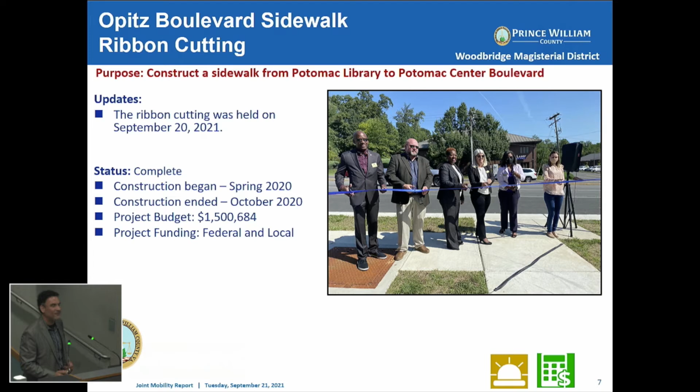Now to some of those active projects that I mentioned earlier. And like I mentioned again, all these active projects, although I'll be talking about the road element to it, have a pedestrian and bicycle element to it, either 1 or 2 facilities, depending on the project itself. First of all, the Broad Run Station and Yard improvements. This is a VRE project. Obviously, some of the related projects to us are the Route 28 Phase 3 and some of the Residency Road Trail that we're doing with that project to connect to this project, which gets its final design completed later this year.

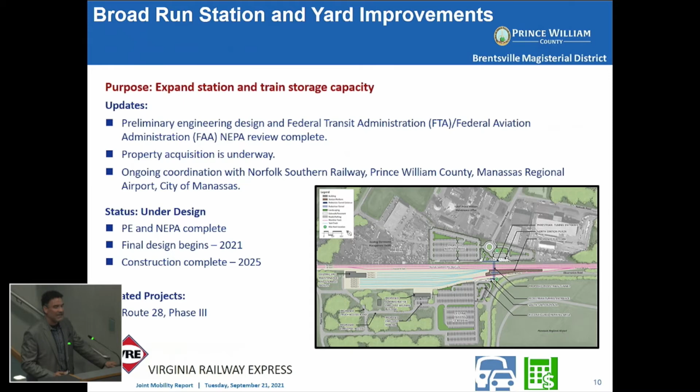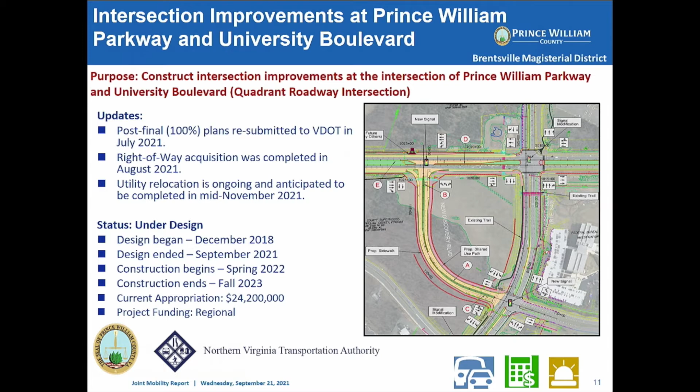The intersection improvements at University, this is our quadrant intersection. We've run into a little bit of an issue and challenge with the utilities out here. Nothing we can't get through, just takes a little bit more time. But we are pushing the bids out to come out later this winter. And so hopefully we can be constructing this facility in the spring and still keep to our timeline of fall 2023.

Route 28 up here, this is a project being done by VDOT. As you can see, they're putting out the little concrete, making that intersection a little safer. And this should be done. If it's not done already, it's very close to being completed out there in the field.

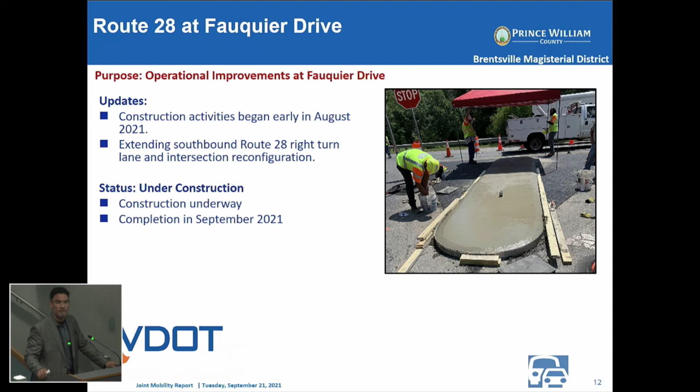Route 28 Phase 3, this is another project that's about to be completed. At least the road part of the project is about to be completed there. We're going to be inspecting this project here, Supervisor Lawson, with VDOT this month. Hopefully the road improvements are going to be good to go. We're going to be able to open them to traffic. The only thing that we're working through again through the end of the contract, which is June, July of next year, are just the pedestrian and bike facilities. One on Route 28, on the Innovation side of Route 28, and the other one on Residency Road, as I mentioned earlier, to hook into that facility for the Broad Run parking.

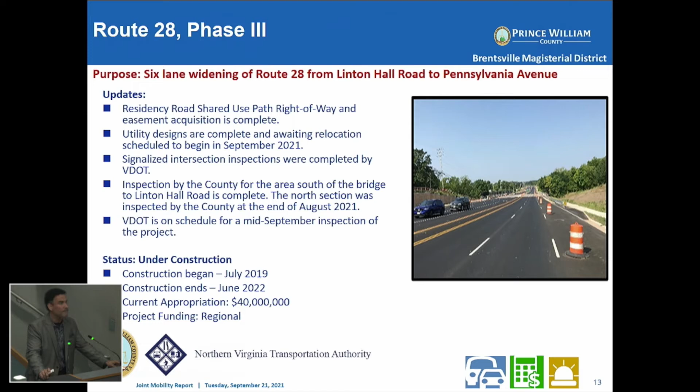University Boulevard extension. So this is when we start talking about Devlin Road, which is one of our bond projects that we have in our 2019 bond referendum, and we're getting completed with other people's money. But we'll start talking Devlin Road and Balls Ford Road here. We're going from west to east. This is the first one, which is the University Boulevard extension, which extends University Boulevard from Edmonston out to Devlin.

But at the same time, it also creates the intersection at Devlin and University that will hook into those Devlin Road improvements we're about to talk about, and is the leg that also transitions into the final leg of Devlin out to Linton Hall that we are seeking funds for and remains on the 2019 bond. So you see that's 2 different improvements. This is our revenue sharing project, so it's half being paid by the state, half being paid by us, and we're doing it in conjunction, as I mentioned earlier, as part of a larger set of improvements here.

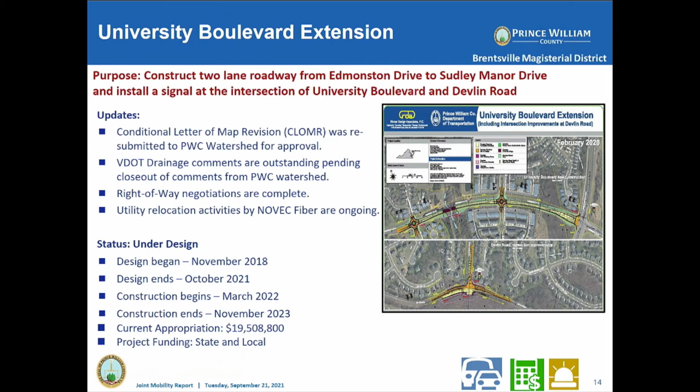This is the Devlin Road North. So I said we were moving from west to east. So this is, as you see here, let me see if I can, there, oh wow, look at that. As you see here, this is the improvement that I was mentioning in the slide before, and it hooks in to the remainder of the road.

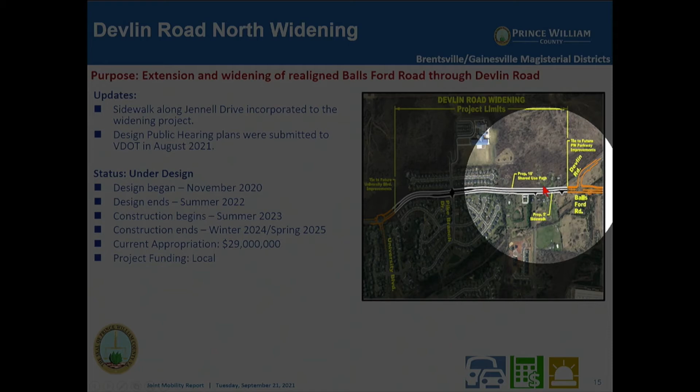This is what we're going to talk about next, which is the Balls Ford Road interchange. So this is the road in between those 2 roads, again, going from west to east. This is the one that's furthest behind. We actually were able to get some funding from the leftover funds of the Balls Ford Road interchange, but it did lag us a couple years behind that project because we did not receive those funds until a couple years after that.

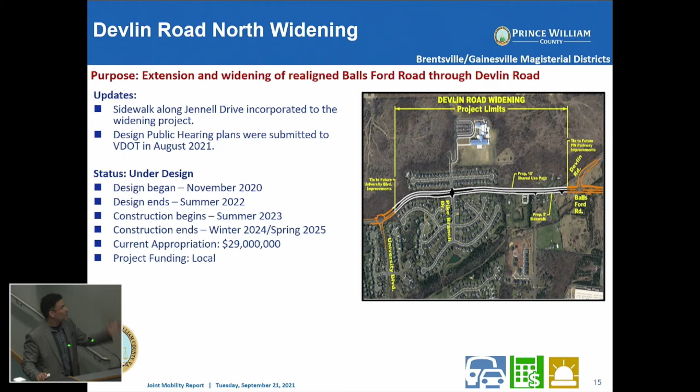The good news about this is the part of the road that was part of the road bond program, and we're able to fund it through VDOT funds and we're able to construct it. We're trying to get this sped up as quick as possible to have construction ending in the winter of 2024, but with some possibilities going into the spring of 2025 to complete the project. It is a $29 million project, and again, VDOT funds as well as $4 million of CIP funds to complete the improvement.

And it literally took from 7 p.m. one night to 6 a.m. the next morning to complete, because we did come into some equipment issues in the middle of it. We were scheduled to be done by 3 in the morning, and it had to be pushed a couple hours. But the sun did come up, and we were finished concreting the bridge, so it was good to go here. We're still on line to finish the main improvements by November 2022, and we're still in some discussions about the roundabout over at Randolph Ridge and how we deal with that safety improvement.

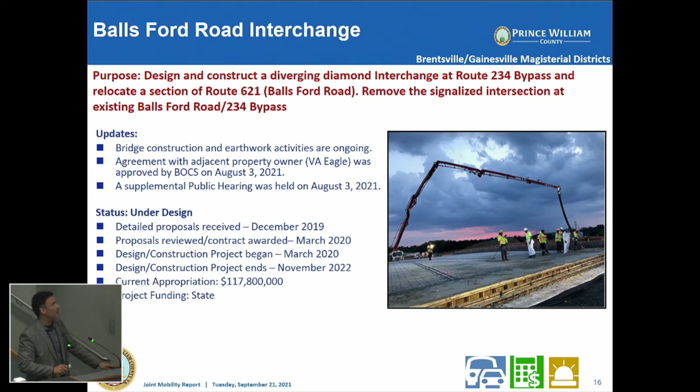The next one is the Balls Ford Road widening on the east side of the 234 bypass. This one takes us all the way out to Sudley Road. We are lagging a little behind because we had to build a duct bank as part of this project, like 5 months behind the initial date to be constructed. We have put an incentive in the contract, over $1 million, to see if we can get this done on time. If not, the contract due date would be May 2023.

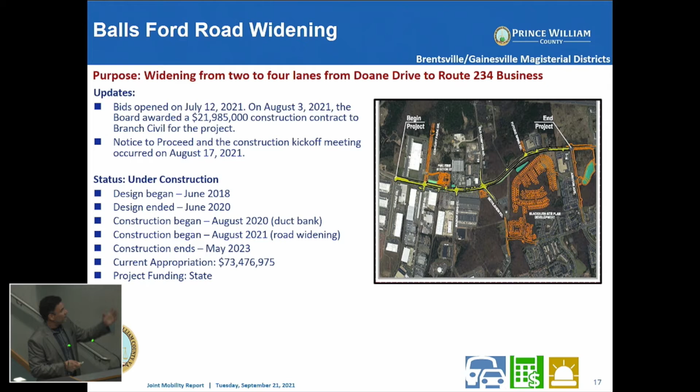We're in constant coordination with VDOT, so they understand where we're at on the project and what we can get built as we finish up with the duct bank out there, and the road widening continues to move forward. So we hope to get it done in December, but if not, we will definitely get it done by the May 2023 deadline.

Transform 66, it kind of gets to everything and all the Balls Ford, Devlin Road things I just talked about. That was kind of how it got to be. But this project is still on line to be completed by December of 2022. We'll talk a little bit about the park and rides that go along with it in a couple more slides.

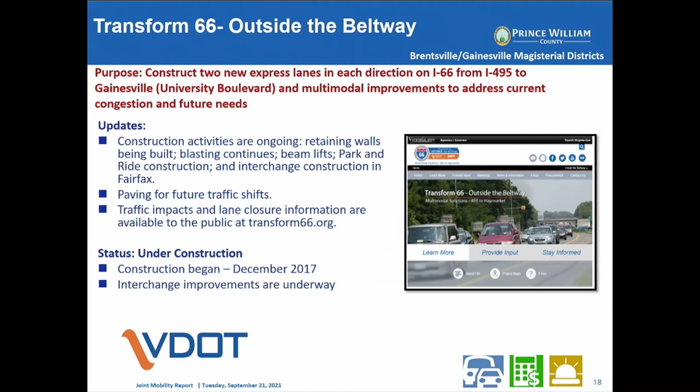Brentsville Road Interchange at the Parkway. We fixed up the picture here so the improvements could be a little more clear. The great thing here is that we've been going through some scope validation, and through that, we've determined that we need 3 additional sidewalk and trail connections around the interchange. We took some of the comments at the public hearing into consideration, which asked for those connections, and they seemed feasible, so we have added them.

Just so we all know, there's a connection to the north side that connects to Godwin Drive, as well as a connection going south towards 95 on 234, and a connection around the ramp space that will create a sidewalk to the northbound side of 234 going up towards 66. So we have added those to the project, and we're hoping to get a public hearing going and get some early grading to start, as this is a design build, and we do some parallel processing as we build the facility.

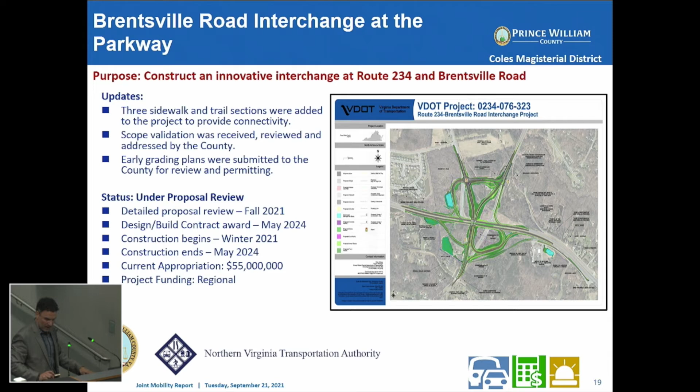Pageland right turn lane and signal. Supervisor Candland has supported this project and funded this project. We are looking to get to construction bid this winter, have it start construction in the spring, and hopefully we will only go through one construction season there, be able to complete it by the end of next summer, and have that light operational and ready by the middle of next year.

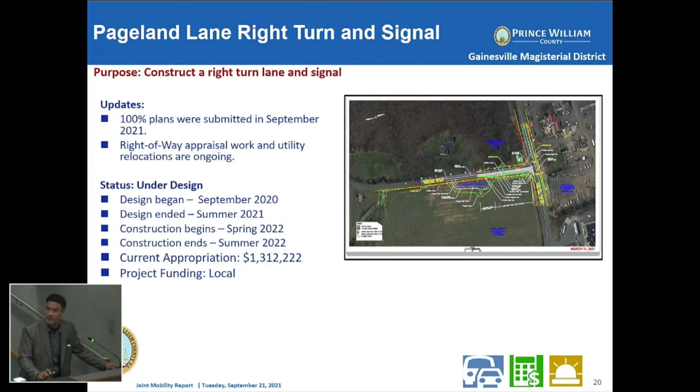These are the parking lots that I talked about. This is the one over by Balls Ford Road that's looking to open in December 2022. This is the one that's right next to the new fire station over there that's constructed. Firehouse, I believe it's 22. And it's going to be approximately 1,300 spaces, and that's what our widening of Balls Ford is going to be able to support as well.

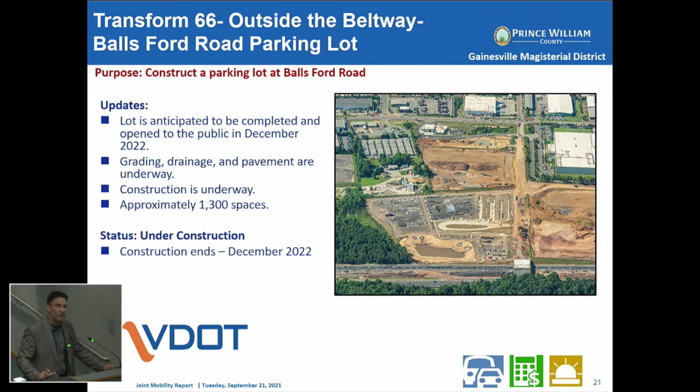The parking lot over on the 29 side of University Boulevard, that's due to be completed also in December 22. That creates approximately 2,000 spaces, and hopefully again will be finished by the time those express lanes come online.

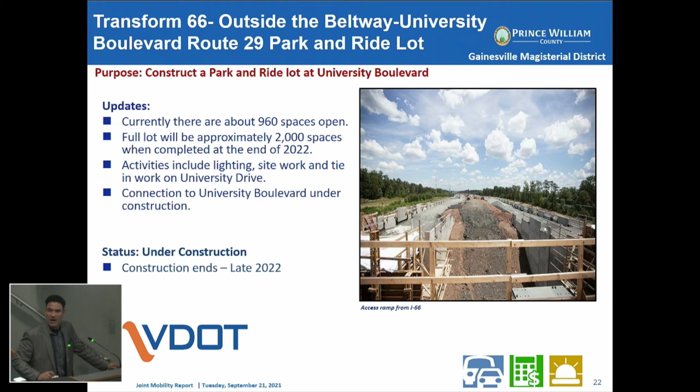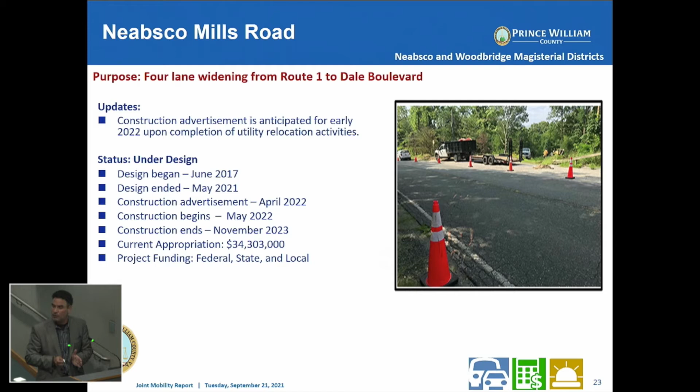Neabsco Mills Road, we're looking to have this on bid by the beginning of next year in January. We continue to do the right-of-way there and continue to deal with utilities through that area. As you know, this is our federal project, so as we finish things, we still have to wait a few months to get authorizations and certifications that we have completed our phases, because it is a federal project. So if you see a lull out there, Supervisor Angry, it's because we're waiting on some of the processing of the federal and state project that we're doing here to get through. But we will be looking to get it to bid and get it to construction this spring.

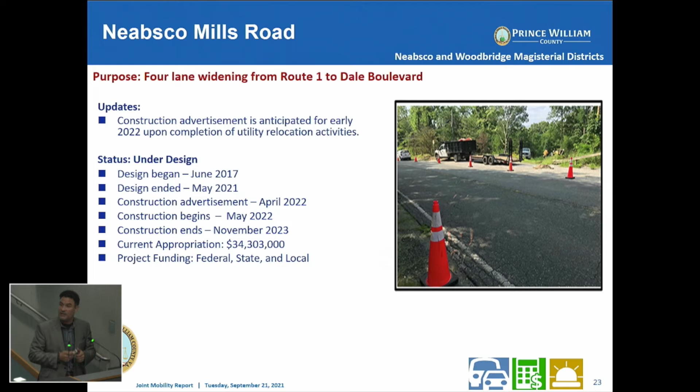Old Bridge Road, Occoquan Road intersection. Again, this is another federal project through Smart Scale. We're working on the design with this and looking at possible early acquisition of some of the sites that we are looking to fully take and seeing if they have some hardship. This is a federal and state project, so we have to ask those authorizations and permissions from the state, and we're waiting to see if they have determined that the hardship is there. Other than that, we continue to design this project.

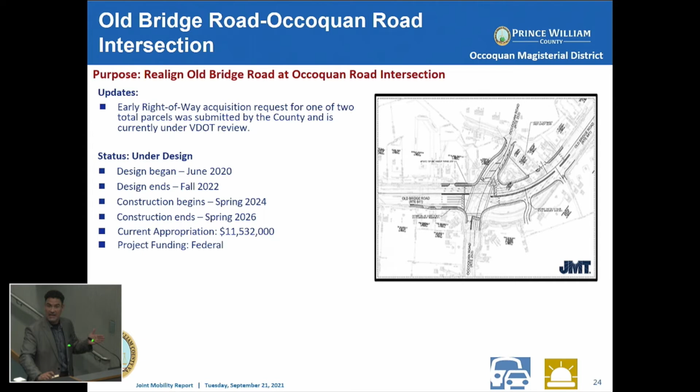We're looking for construction to begin in 2024 based on the cash flow that VDOT gives us for this project. As you know, we got the money ahead of time for design, so we can design it and get some of those issues through. By the time, hopefully, the construction money comes through, we'll be ready to go.

Summit School Road, another one of our 2019 road bond projects. This one has been fully funded by the NVTA, though, so we will not be taking out any bonds on this. We have gotten the design approved, but we're looking to finish up our right-of-way and utility relocation through that area. Supervisor Boddye, as you know, we have a lot of development that's coming up in that area now that they know that the road is coming in, and we're working with all those developers to make sure they got appropriate access to their land.

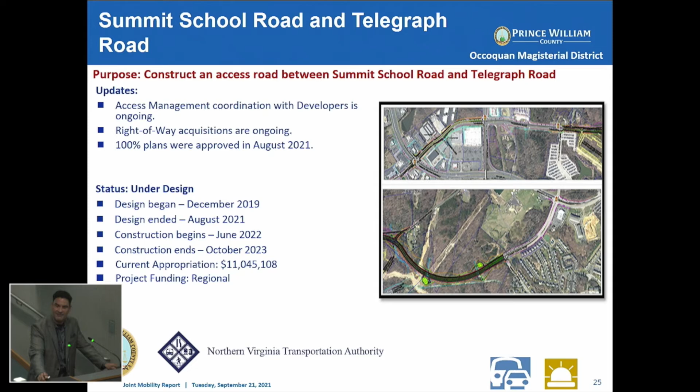Fuller Heights Road is our federal project we have down by the Quantico entrance. Supervisor Bailey, you know that it is also a federal project. We're lagging about 18 to 24 months behind the Quantico opening of that entrance, but we're trying to get it open as soon as possible. We have acquired all the right-of-way and certified that, so we're looking to bid this project out as well this winter so we can get working on it in the spring of next year. We're hoping for a one-year time frame in construction. It might be a little longer right now. That's what we're hoping for. We'll see what we get with the bids, so this project could be done in April of 2023.

Quantico Station improvements, those are ongoing right now. The improvements to the station are happening, and it's about a 26-month construction schedule. Some of the related projects you see there are the third track from Arkendale to Powell's Creek, and then also the future fourth track through this area.

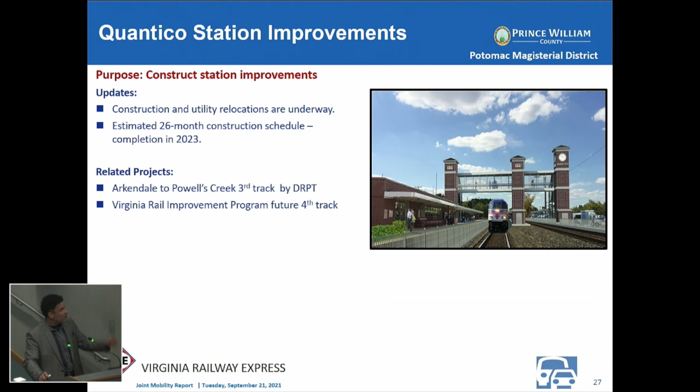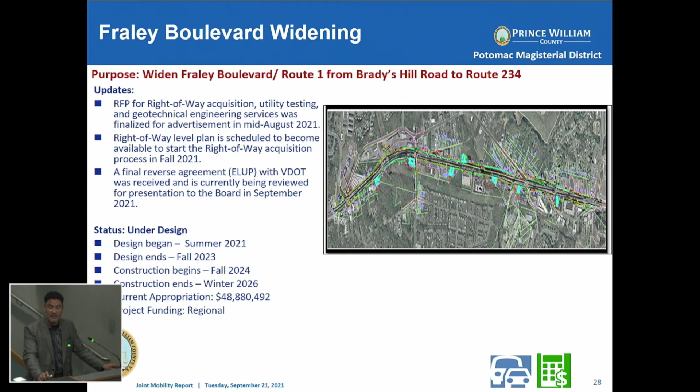Van Buren Road environmental study. You know we're doing the EIS here. We had a meeting regarding an update to this project. They're starting to do some of the survey out there and in some of the areas that they can get into, to be able to get some of the information on some of the environmental, social, and noise impacts that we have out there. We're looking to have a lot of that information ready by this winter.

Some of the information, though, because we have missed some timelines on when those tests could be done because we couldn't get on certain properties, we will have to do those tests at the beginning of next summer and have the results for you then. But we are hoping to have, once we get those results, the study completed by the end of next summer for you. We will be looking to have some public hearings and additional public meetings. As you know, this is a very well looked at project, and we have a lot of people that are interested in the results of this study.

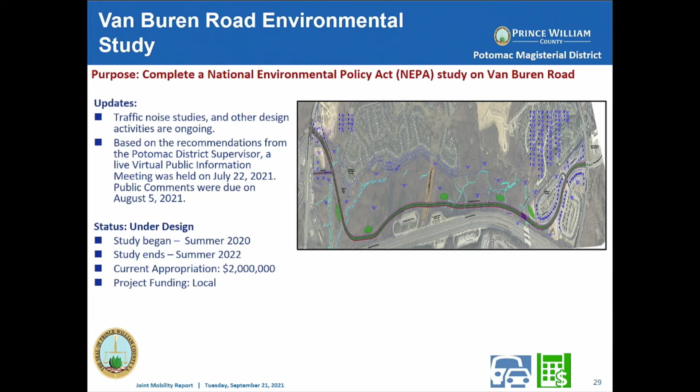The 95 Express Lanes Opitz Boulevard ramp. This is the first time you've seen a design of it, but what this is, it's a ramp that opens, as you see in the second bullet, on the northbound operations. The ramp will provide access to Opitz from the south, so people can get into that area, the Potomac Mills and Potomac Heritage area, and also use the new parking facility that's being developed in front of Stonebridge.

And then at night, it turns into a southbound direction going south on the express lanes as those express lanes operate at night, allowing people to leave from the Park and Ride facility or the Potomac Mills and Potomac Town Center area. The anticipated public hearing is coming up next month. They'll be setting that up, and we'll be able to comment on the project. It has been done in coordination with us because it is close to our Park and Ride facility, and we have made sure that it includes sidewalk connections to the facility that we are creating on the north side of Opitz Road.

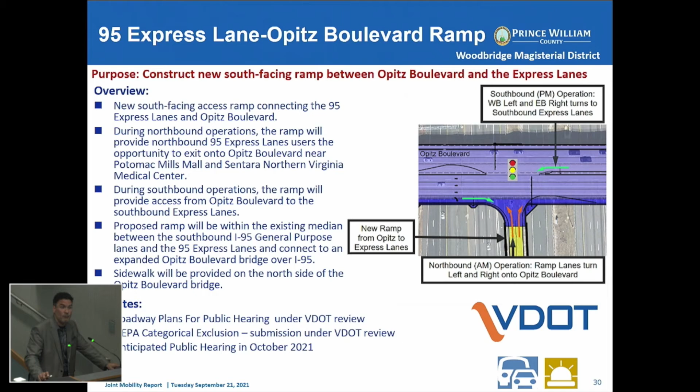The I-95 southbound auxiliary lanes, I know you see some of that work being done out there. We're hoping that that's done by the fall next year, and I think that will be a big traffic reliever for that area, at least on a temporary basis, because it'll extend that lane and it'll give a larger transition. So hopefully if it doesn't allow for additional volume, at least it'll allow for better operations and a little safer transition onto the main line lanes of I-95.

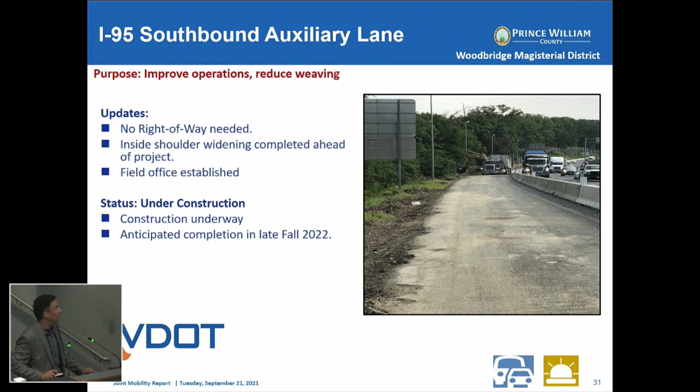This is a federal project, but we are going to do it as a design build. So as soon as we get the award, we'll be able to start looking at some ways to start the construction or clearing out in this area.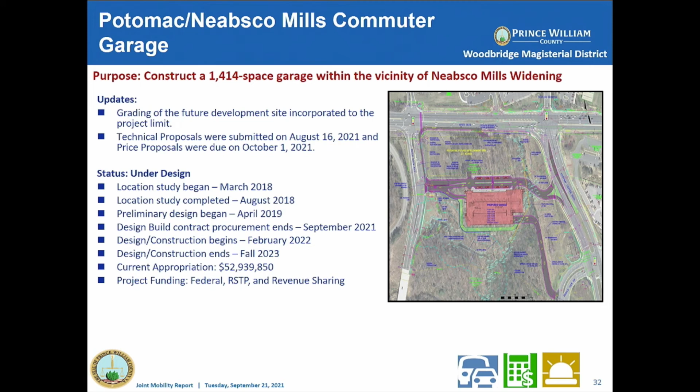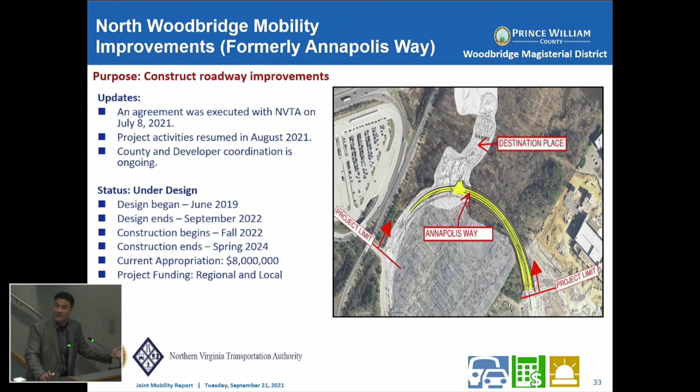So we were glad to get that $8 million to be able to bring that project forward and get that project completed before we were even supposed to get the money. So we're excited about that, and we're hoping to reach that goal. Route 1, Featherstone and Mary's Way, if you drive down that road, you know it's under construction.

We have a lot of construction activity going on in many different areas. The only thing I ask Supervisor Franklin or Chair Wheeler or anybody on the board, if you have a high-level contact at Comcast, we really need that last line put in underground so we can do some of the work out there. It's one of the things.

I have gotten some contacts from Christine at Economic Development. We'll be reaching out to them, but anything you can do to help us out there, to talk to someone at Comcast about getting that last line in, it would be more than appreciated. A lot of times we lag because of utilities in these projects, and it's because we don't have control of them.

They come in and do the projects, we pay them to do them, but it's usually at their schedule. This is the last one we're looking for, so we'll be looking to move forward and get that construction complete and get in touch with Comcast as needed.

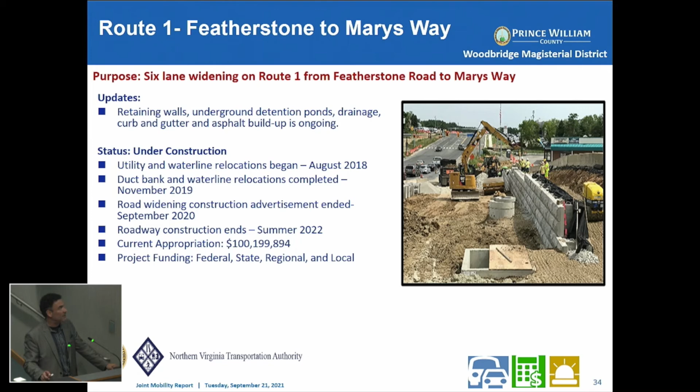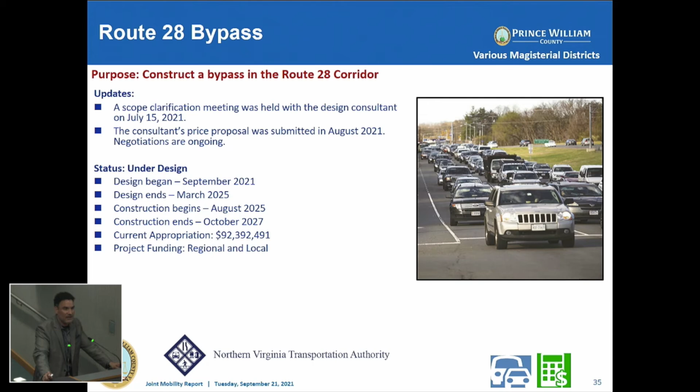We have a meeting with the consultant, the chosen consultant, WSP, to do some final negotiations on Thursday. If we can get to a final price before the item is due, we'll get it in October 5th. If not, we will come back to the board on October 19th to let you know how we did there on that project.

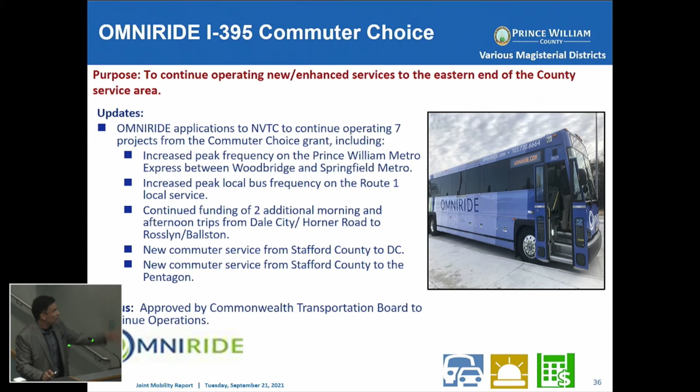OMNIRIDE Commuter Choice. The next few slides are going to be regarding OMNIRIDE and some of the efforts they're putting forward. This is the applications to NVTC to continue operating the Commuter Choice grant, and you see there what they've done and what it continues to fund, and the new commuter service that is being offered from Stafford out to DC now. The next one is the operating enhanced service to Eastern.

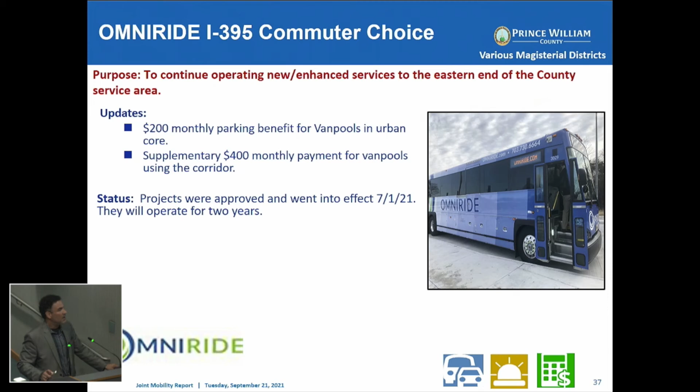This is the Commuter Choice again. This is the $200 parking benefit for van pools, as well as a supplementary $400 monthly to try to get these van pools up and going again and get these other modes of transportation moving. Hopefully the people are starting to get past the COVID era, but we continue to work and be careful with it, and you'll see some of the stuff we're doing with VRE as well on that.

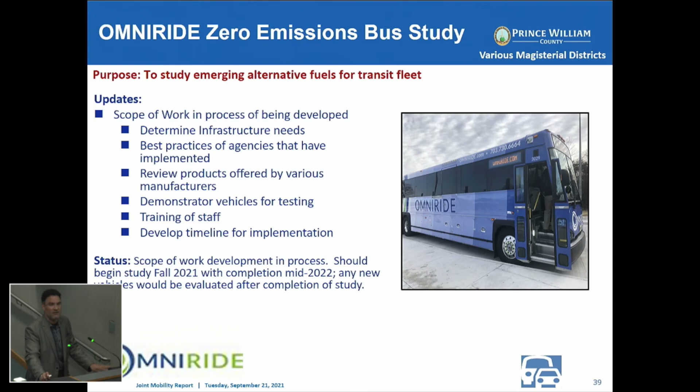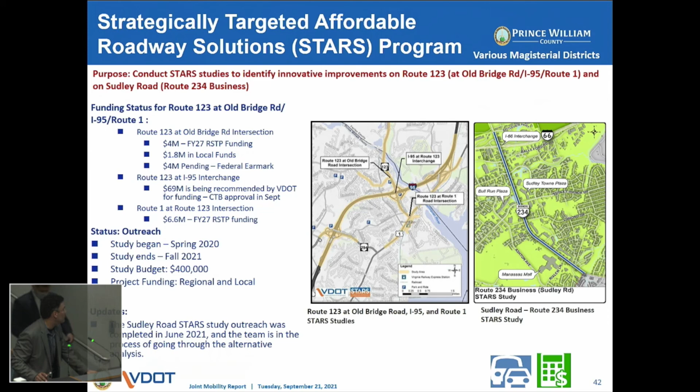Sure, thank you, Rick. Quick update. So in this slide, we have the VDOT STARS study. This study looks at innovative approaches to our standard mobility designs. So we have the 123 STARS study, which looks at improvements at Old Bridge at 123, 95 at 123, and Route 1 at 123. The good news at 95 and 123, last week, the Commonwealth Transportation Board approved $69 million for improvements at that interchange. So more to come on that.

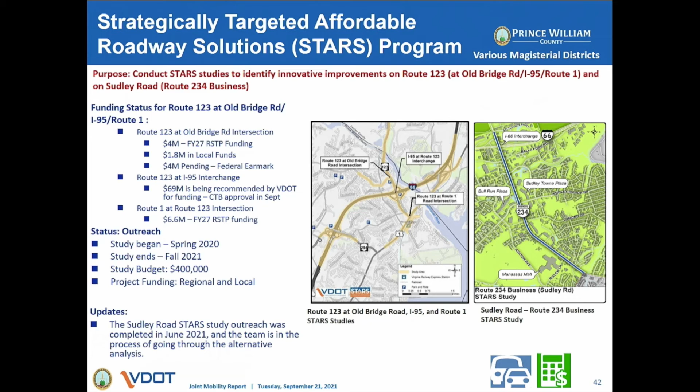The other STARS location is at 234 Business. We're looking at safety and operational improvements. The 123 studies will wrap up and be completed by the end of the year, whereas the Sudley Business will be completed early next year.

Rick mentioned the pipeline studies. These are the corridor-wide studies. We just had a kickoff meeting with VDOT recently. The two corridors we're looking at, Prince William Parkway between Smoketown and Caton Hill Road, as well as Route 29 between Route 15 and Linton Hall Road. So we're working with VDOT to look at safety and operational improvements at these locations. This will be completed early next year.

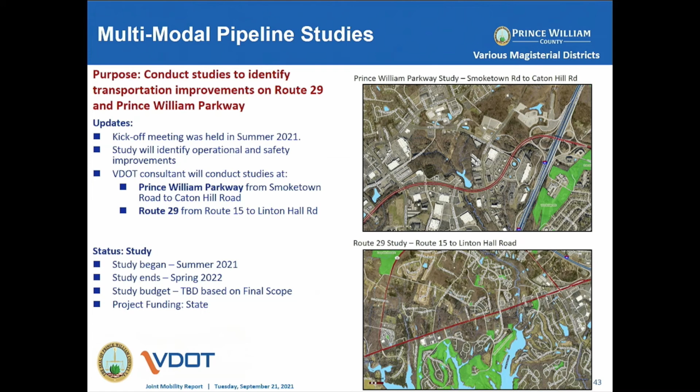Other similar studies, these are pre-scoping studies, look at development for concepts or feasibility of new projects. The three new locations we have: improvements at Dale Boulevard and Minnieville Road, to see what kind of intersection improvements can be implemented; looking at extending Marina Way in North Woodbridge, to see the feasibility of that connection; as well as a park and ride feasibility study on the existing Route 28 corridor.

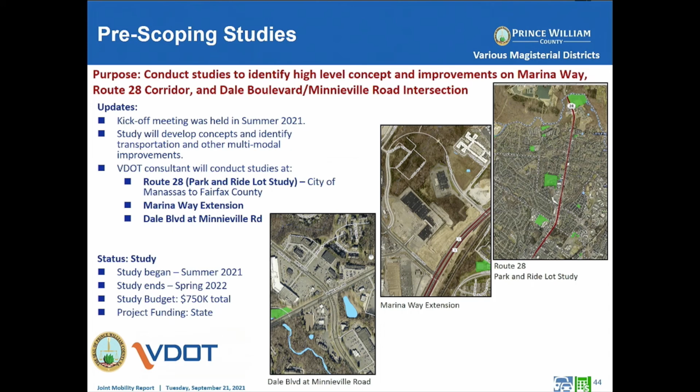These are just examples of the different studies that are ongoing, which really help some of our grant applications. The more developed grant applications we have, the more successful they become as we move forward. I want to hand it back over to Rick for bike and ped improvements.

Thanks, Paul. And again, I wanted to bring that to everybody's attention because I wanted to make sure that you knew what was in the pipeline, what we're looking at as a department in all the different corridors, and what we will be bringing to your attention as some of these studies start developing and getting some results. We'll be bringing those to you to make sure you're aware of what we're looking at, how we're looking at it, and what VDOT, because again, these are all in coordination with VDOT.

These are all being done by VDOT consultants and VDOT staff, but the county has a very good seat at the table where we're very cooperative with them in making sure they understand the needs that we have, not only transportation-wise. Some of the things that I think VDOT lacks in looking at are some of the land use decisions and some of the things we have going on around our community that they are not aware of, that go beyond the throughput.

So we'll be talking a little bit more about those studies, especially with each individual board member that the studies affect in each district, and we'll be making sure that you get to be part of the seat at that table as well and get your opinion into the studies. We will also be informing the Planning Commission, as they're asking to get informed of some of the stuff that's coming their way or that we are looking to come our way for grants. We will be speaking to them and making sure that they are aware of some of these studies as well.

The last couple things I wanted to get to, like I mentioned earlier, that I usually do not have on this report, are some of the bicycle and pedestrian improvement projects and some of the operational improvement projects. I won't go through any of them, but as you see, we are looking to get into bid with a lot of these, especially these three here, in the next couple months, or have gotten a bid and are waiting to be able to move forward. These are very important sidewalk project connections that connect you to transit, as well as connect communities and facilities that are needed. Old Bridge Road Sidewalk, and we continue our effort to get Old Bridge pedestrian and bike facilities on both sides of the road.

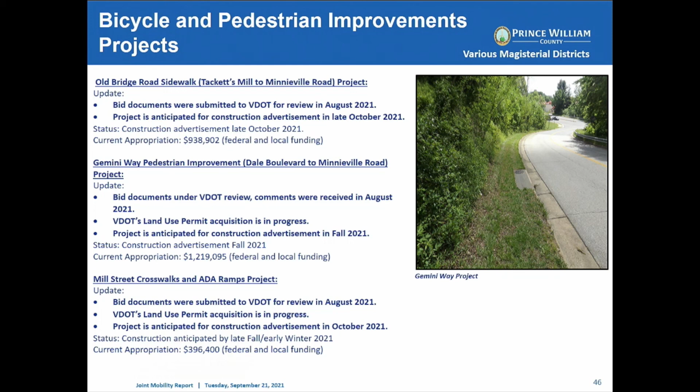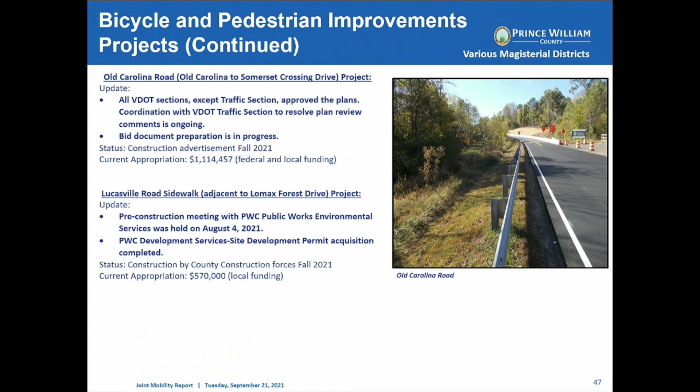Gemini Way pedestrian improvements in Dale, this is a very important project. Before we started, there was a goat path on the right side of that road that led all the way up to the shopping center and commuter lot. So we're very excited to get this project going and moving. Mill Street crosswalks that we're working with the town of Occoquan to improve. Old Carolina Road out in Gainesville, making sure we get that project out to bid and advertised this fall. Lucasville Road sidewalks, I think our construction crews are going to be doing that piece of sidewalk to make sure that we have community connectivity through there.

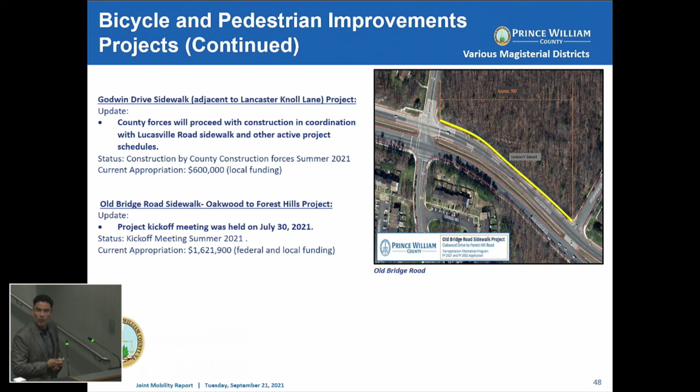And then finally, last couple, Godwin Drive sidewalk. County forces will be doing the coordination as part of Lucasville to do this one as well. And finally, we have another piece of Old Bridge Road, but this is a newer piece. We just started the design on this, so the bid's going to be out a little later. We're looking to have a kickoff meeting and then be able to bid this out probably next year or so. With that said, some of the smaller operational improvements, and again, I don't want to go through them.

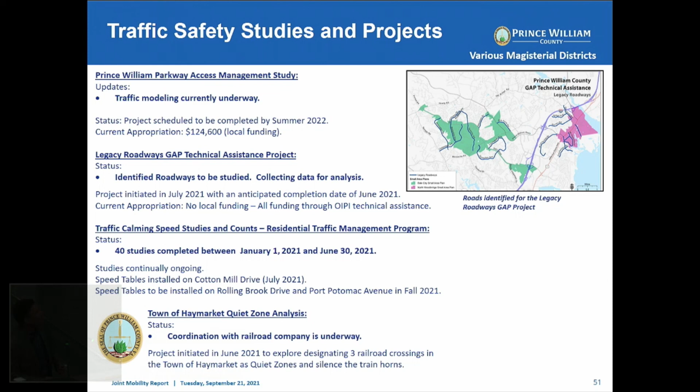There you go. Through all these improvements, but I'm sorry, I have lost control here. There we go.

All right, small operation improvements. First of all, we're doing a study for access management out in the east end through the Prince William County Parkway. This is being done with local funds and is scheduled to be completed next summer to talk about how we have better access and operations throughout the Prince William County Parkway in the east end of the county.

Innovation Park Streetlight Project: what you see there is what's existing on your right-hand side, all the way at the top corner there, and then how we expect it to look after we light up the intersections in the area. All this is getting the Innovation area into DCSM, or Design Construction Standards, for lighting the area, and we're making sure that we light all the intersections, and some of them are actually being done with the Quadrant Interchange project that we're doing out there. So we're very excited about getting all those street lights in place by hopefully the end of this year.

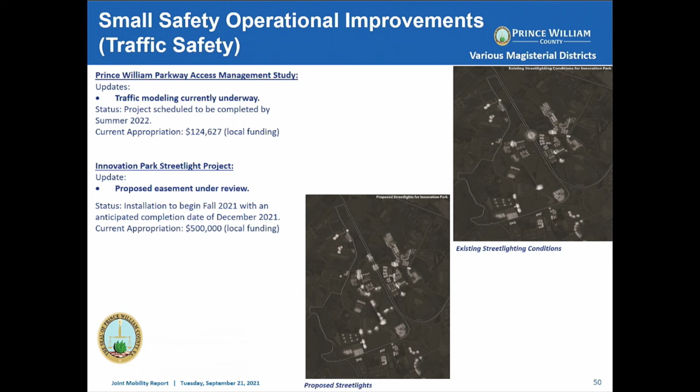I talked about the management study. We're doing a gap technical assistance project that we got some funding for. We're doing traffic calming speed studies. You see the number of studies that were completed just between January and June. So in half a year, we've completed 40 studies county-wide. So we got Richard and his guys working really hard, believe me, and his gals. Also we've been installing speed tables, as you can see there.

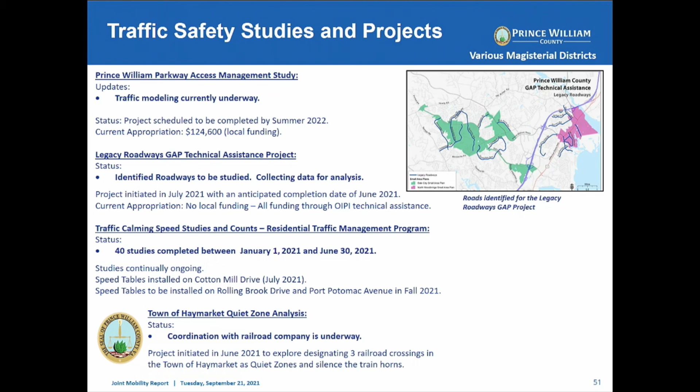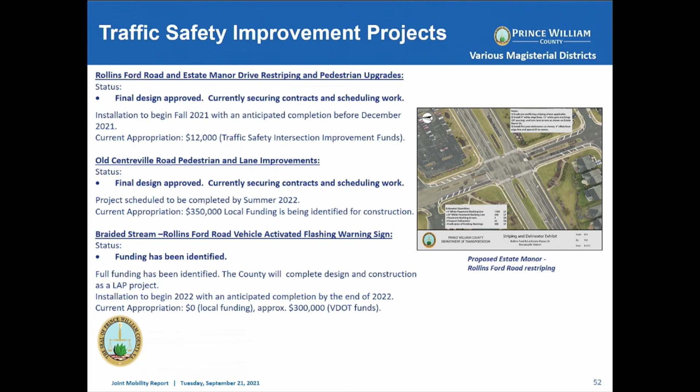We've been working with the town on their quiet zone and seeing how we coordinate there with Supervisor Candland's office. Rollins Ford Road and doing the restriping there. We've gotten the funding to do that as part of our safety budget, which is going to go great with the Braided Stream Rollins Ford flashing warning signs that we got money from VDOT as part of the signals. I know that the board received a memo from myself and the CXO that we got funding for 3 additional signals, and the 4th project was the installation of those signs. So we're excited to put those together, and Richard's group will be implementing that as well.

We talked about the 3 signals. The 3 signals that VDOT will be funding are listed up there. We know the Queen Chapel Hoadly Road signal very well. VDOT will be implementing that project. That's going to be the priority project to implement, and they're aware of that. They're hoping to get the design done by the end of this year to have that signal operational and completed by the end of next year. So that's the time frame. That's going to be the first one up of this group of signals.

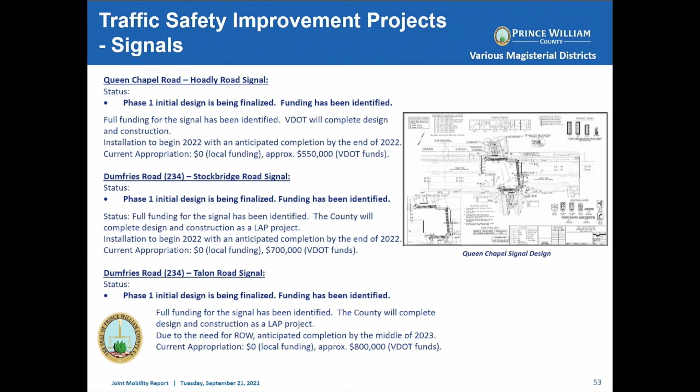Finally, county road maintenance and state acceptance program. We are looking to do a couple projects with some monies that the board gave us last year to get some of these streets into the state system and get them off of our payroll of having to maintain them. But we also had to do some road maintenance on some of the streets that the county still owns, as part of University Boulevard and Industrial Court. And then finally, the Hanson Lane cul-de-sac, we're currently completing that to get it into the state system.

But again, I just wanted you to be aware of everything that our department is doing, not only getting streets into the state system, but those smaller projects, those major sidewalk projects, as well as the major $100 million interchanges and road widenings that we do. It is a big scale from $500 to $300 million, and we do all the work in between. So we appreciate your support as we move with these projects, and as we come here in need of your approval for the contracting, the right-of-way, the approvals of all these projects. But that is your transportation program in a 55-page slide.